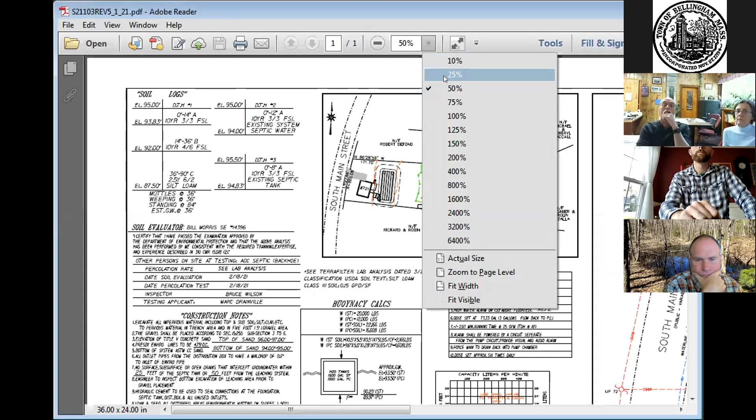Okay, this is a proposed septic repair for an existing 4-bedroom house. Now, apparently at the last hearing, we had missed a drainage pipe that goes right along the side of the property. You can see it right here in blue.

The earlier design, due to the slow perc rate, the system takes up the whole backyard. There's nothing I can do about that. I have to maintain a certain square footage. Actually, the square footage is about 1,700 square feet. That's how big this system has to be because I have a very slow perc rate.

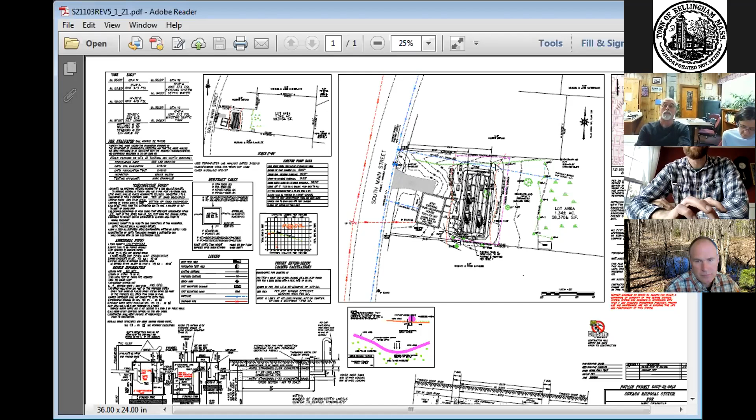But with that said, with this drainage pipe here, I was able to reconfigure this rectangle to accommodate the Title V requirements, still stay out of the 50-foot buffer zone of the wetland, and still be in compliance with Title V.

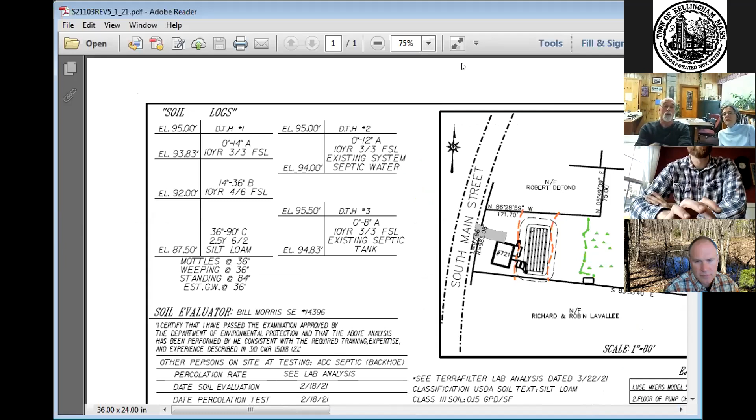I'm trying to zoom in, but for some reason when I do, it just kind of loses part of the system. I don't know what's happening there. That's okay. For some reason it lost the detail. I don't know why that's happening, but if I go back to 25% it shows it. Maybe it's a memory problem.

So basically, all this right here is the septic design. I was able to make it a little fatter and shift it this way, so I'm 10 feet away from that drainage easement, and I don't touch the 50-foot wetland line with my system. And these revisions have been approved by the Board of Health.

Good. You know, Margaret, Ann and I were out there inspecting this. We stood on the outfall for the drainage pipe. We saw the catch basin in the road, and we never put together that there was a pipe in the system.

Mike O'Haron, one of our members, picked that up at our last meeting, and I'm glad he did. Me too, I'd much rather find out now than during construction. It's the same here - I didn't give it a thought, and when we flagged that wetland, that pipe was half buried, so it wasn't evident and we missed it. I think my surveyor should have picked it up, but it fell through the crack, so I'm glad it got brought up at the last meeting.

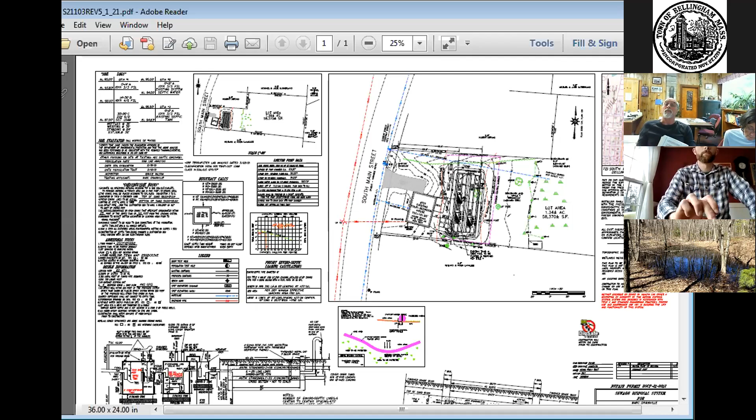Okay, so while we have people here, how does Saturday morning look for folks? I can do Saturday. Sure, that's fine with me. Okay, 9 o'clock. Sounds good. Noel? Yep, I may or may not be able to make it - I have a wedding that day, and I'm getting vaccinated.

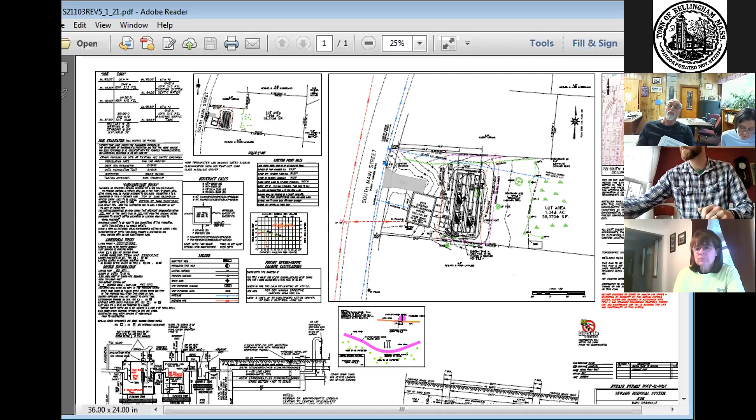It looks like Sean said yes. Mike, yep. Noel, Ariane, okay. I will sign it as well, so we'll have a majority. I can be there too. Brian can be there too. There he is, okay. Our die-hard Brian - I didn't know if we'd see you tonight, Brian. Perfect.

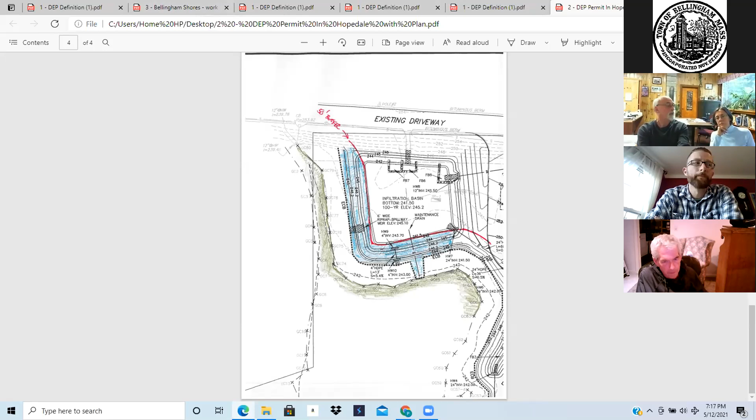And this area in red, again, the red area shows the 50 feet to the wetlands, and then the off-grading is between the wetland and the 50-foot buffer. They did keep the bottom of the basin, again, 50 feet from the wetlands where the infiltration does occur.

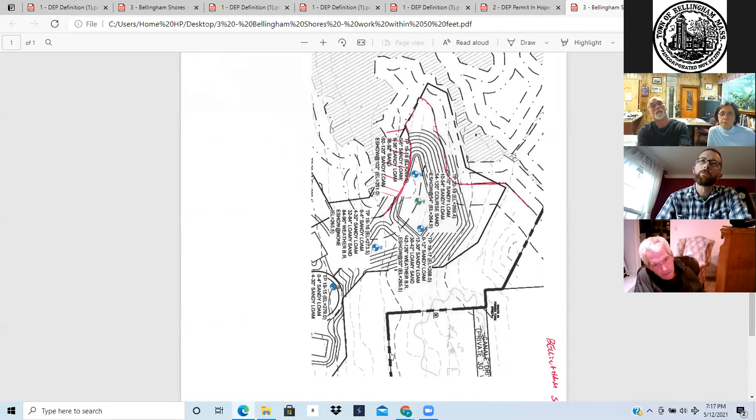Secondly, or thirdly, I'd like to show a project that Lincoln Properties did on the abutting piece, where they didn't hold 50 feet to the wetlands. This got approved at the state and local level where the infiltration basin actually sat on top of the wetland, so they had zero distance to buffer zones whatsoever. They actually filled in the wetland and then put their infiltration on top of it, which is in direct contrast to what Mass DEP says.

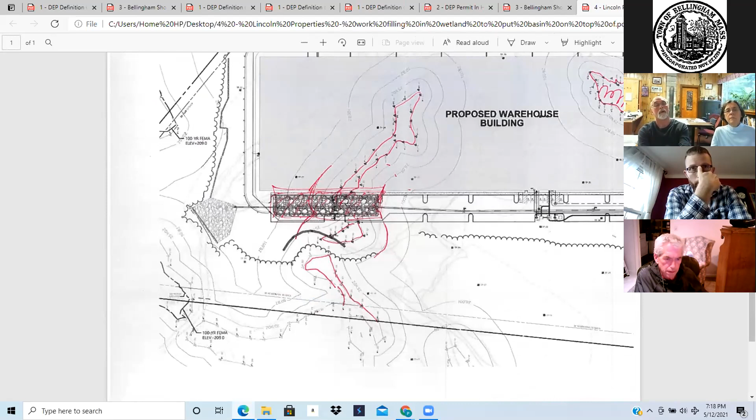And the last item is a previous project that we did — it's two more. Pine Hollow Estates was recently approved, and that work in similar fashion, the red being the 50-foot to wetlands, shows that the infiltration portion of the basin is greater than 50 feet, but the off-grading, the overflow spillway, and the outlet control structure are between the 50 and the wetlands.

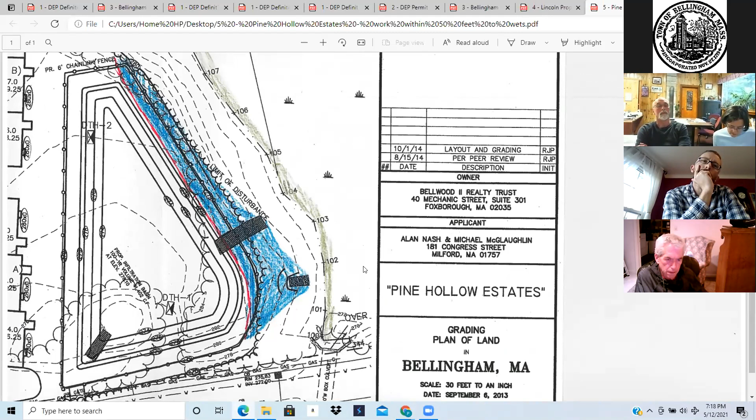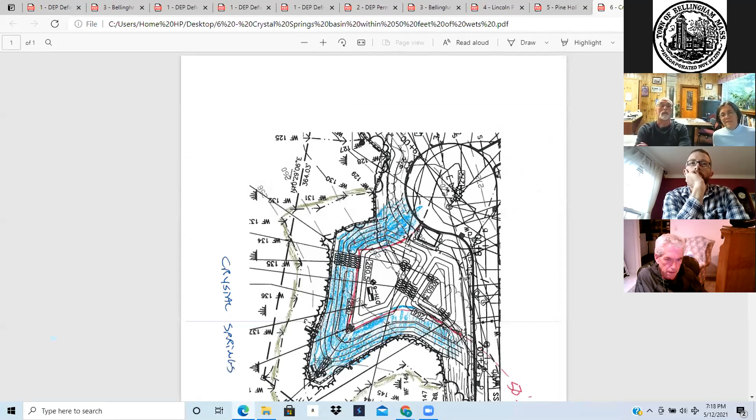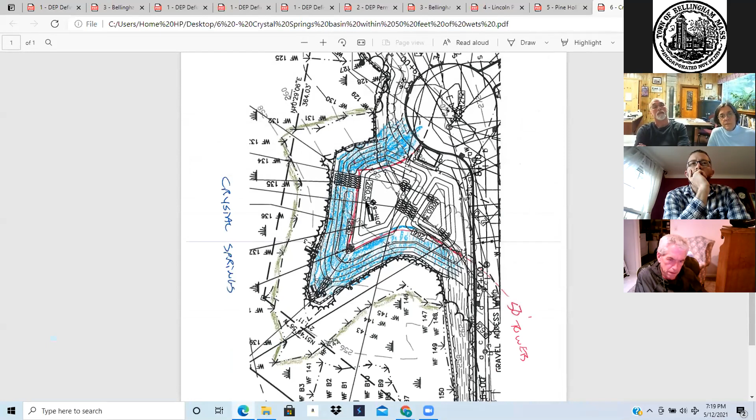And then, just because Kevin Lobiser is the applicant here, he was also the applicant on Crystal Springs, a condominium development off of Crystal Way. You may recall that this basin at the end of the cul-de-sac had its infiltration basin designed specifically so that the bottom of the infiltration basin was greater than 50 feet away from the wetlands, shown in red, but the berm, the outlet control structures, and the riprap spillways were all between the wetlands and the 50-foot zone. I think we have, and I can pull up hundreds if not thousands of other projects across the state exactly like this.

So I think we have a wealth of knowledge of how DEP acts as far as what that definition occurs. They were correct in their letter that said 2 of the 11 basins were within 50 feet, and we've made those changes. And that is exactly why I have reached out to DEP today, Mark, because if we're not getting the proper information from them in their comments, then how do they expect us to administer the Wetlands Protection Act?

Just the same way we just did the last 6 examples. We need to talk so that we can find out what is going on with these comments. That's all I'm saying to you. What we're saying is we're making our effort to try to work with you. And that's all I'm trying to say.

So what I'm saying is, in lieu of having a DEP response, we've just shown you 6 examples of how they've acted. And we can show you hundreds of examples. I didn't write the DEP comments. DEP wrote the comments, and they said 2 of the basins were within 50 feet of the wetlands, and we moved them out.

Never stops there. Excuse me, Mark. We are the local authority that administers the Wetlands Protection Act. Are you a commissioner, Ann? Excuse me? Are you a commissioner? I am the administrator. Okay, I just want to hear that, that's all.

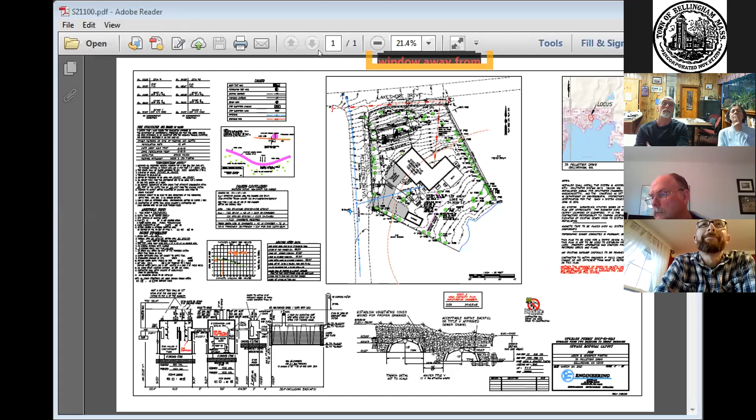Okay, I'm here representing my clients, Jason and Jennifer Fantini. As you said, they are upgrading an existing 2-bedroom house to a 3-bedroom. They're adding an addition, and because of that, they have to upgrade their septic system. So I'm going to zoom in a little here.

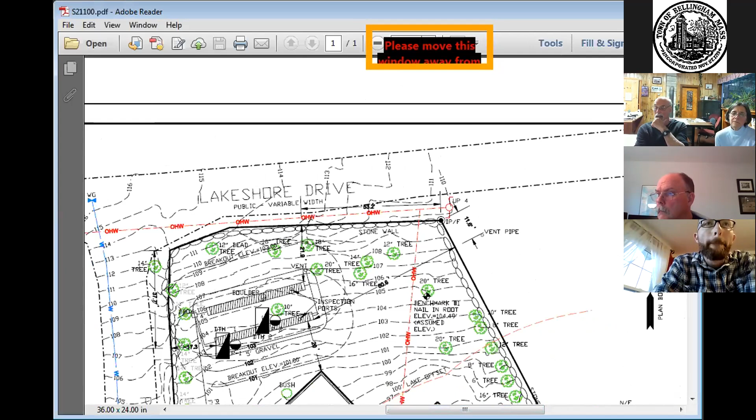Bear with me here. Okay.

So just to get your bearings, here's Pelletier Drive. They're right at the corner of Pelletier and Lakeshore Drive. Their existing system is in this general area right here.

So in order to upgrade from a 2-bedroom to a 3-bedroom house, waivers are not allowed, so you have to meet the full requirements of Title V. In order to do that, we had to move the system over here so I had enough room. Otherwise it'd be too close to the lake on this side, and it would have been a raised system over there due to groundwater.

So basically what we did, where the existing system is right here, we're replacing the existing tank. We're going to pump and remove, put in a new septic tank, a pump chamber, and then pump up to a 3-bedroom septic system, infiltrator system in the front yard on the hill. It is a step system, so it blends into the hillside much better.

As you can see, the septic system is outside the 100-foot buffer zone. There's the 100-foot buffer zone right there. So the only thing in the buffer zone really is the septic tank and pump chamber. So we're requesting a permit to do that activity, to upgrade.

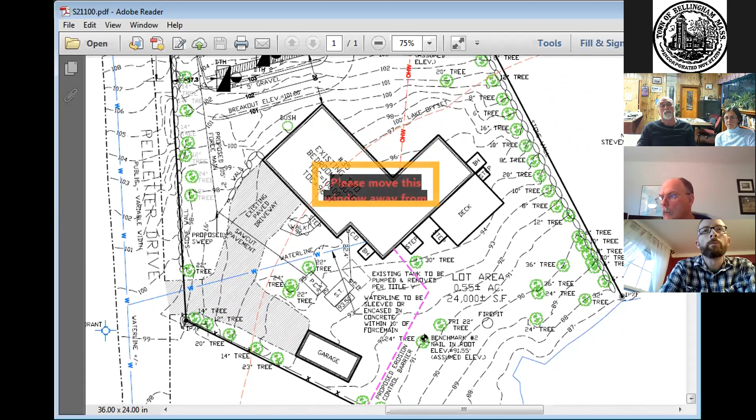Margaret, is the existing system failing? It looked like there was some breakout down there somewhere. I didn't notice it when we were out there surveying it, but I do know if they wanted to put in an addition, that system has to be upgraded to a 3-bedroom. And so that's what's actually triggering this. As far as I know, I think their system works, and I didn't notice breakout when I was there.

Do you happen to know how old the current system is? I'm willing to bet it's probably the same age as the house. That's my guess. Okay, thank you.

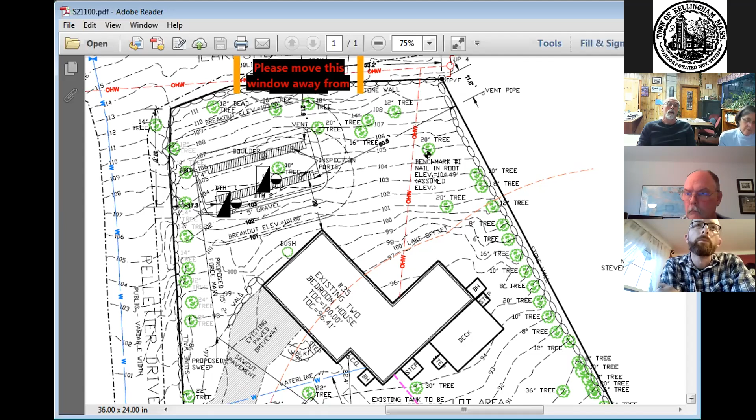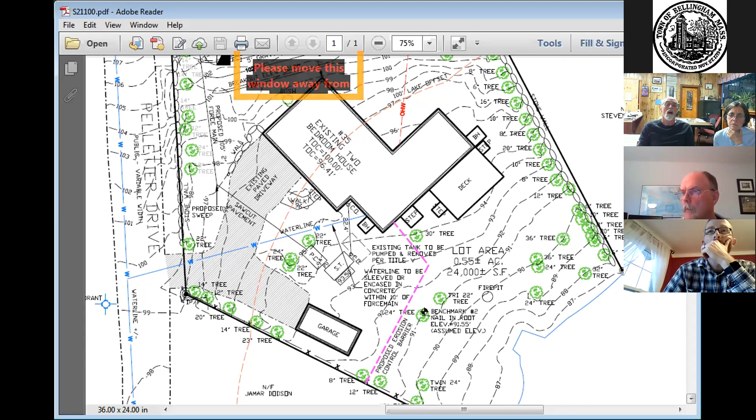Are you going to be removing the water line, or going under it? Chances are, it depends upon the depth of the water line. We won't know till we actually start digging, but anytime you cross over or go under a water line, you have to sleeve that water line, 10 feet on each side. So chances are we're probably going to go over it, but I really won't know for sure. It is a force main, 2-inch force main, which gives extra flexibility. That's correct.

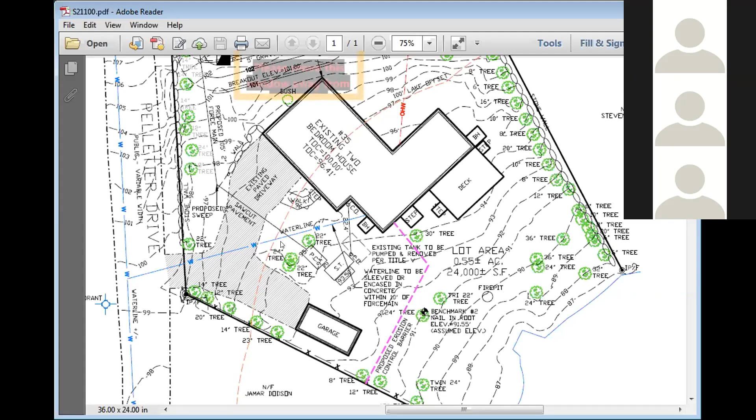Excuse me, Mr. Chairman, we have a question from somebody. Are they allowed to unmute? Can they put themselves on screen? Can they go on video? Yes, Jennifer, could you put yourself on? There we go. Thank you. Okay, hi, hello folks.

This is Jennifer Santini, the homeowner. In fact, our system is failing, that's why we're replacing it. It is the original system to the house. The house, I believe, was built in the early 50s. And so it's time for an upgrade.

Okay, so we'll need to make sure that that area is removed and clean material put in. Margaret, you're going to have to see that. We suspected that was the case, we didn't want to walk down into it. It's down near the water, probably just the other side of your sediment erosion control in that area. We can remove the contaminated material and loam and seed that.

Okay, so what we'll do is put that in the conditions. Jennifer, thank you. Did you have another question, your hand was still raised? No, I think that was from the previous raise, but thank you very much for all your help. Thanks, we appreciate it.

So yeah, we'll condition that: remove the material, put in clean fill, loam and seed. Other than that, it's a pretty straightforward project. It was an easy wetland delineation because it's the edge of the pond, the lake. Everything was as represented, and we saw the test pits, suitable material.

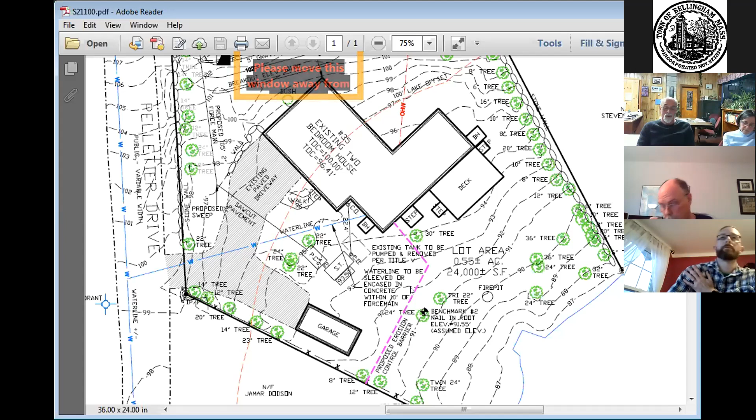So moved. Second, third, fourth. Discussion? All in favor? Aye. Okay, by unanimous vote, this is another one we'll put on for signature on Monday.

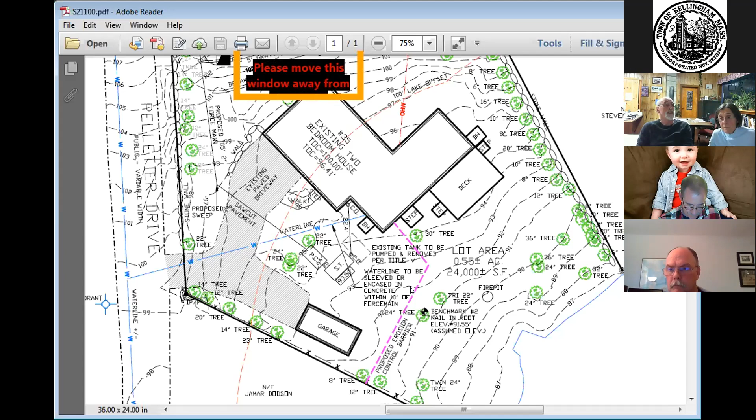Good night. Margaret, shall I send that to you, or do you want to pick it up on Monday too? I'll pick it up at the same time as the other, but could you put that on single-sided also? Of course, of course. Oh, she wants everything, yeah.

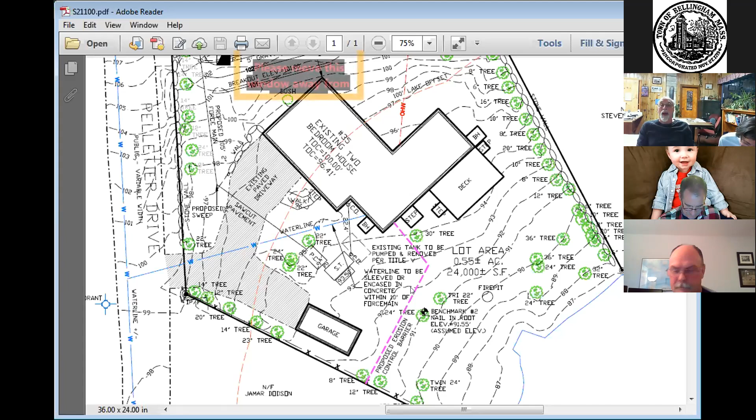Really, you want that gift wrapped, Margaret? Trust me, it's for recording purposes. It makes it a lot easier. Oh, yeah. Okay. All right, okay, thank you. No problem, no problem.

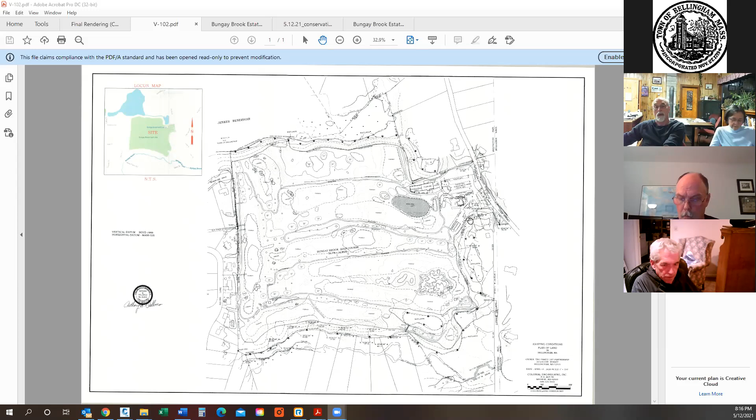Currently, the site is a 57-acre property, which is currently operational as a 9-hole golf course known as Bungay Brook Golf Club. There is a clubhouse located on the northern portion of the property with parking spaces for about 130 vehicles or so. There is a single family residential home, let's see if I can zoom in here, shown here, and a maintenance facility that services the property. There is a lined pond that provides irrigation to the property. And then off to the north, there's basically a driving range, and like I said, it consists of a 9-hole golf course.

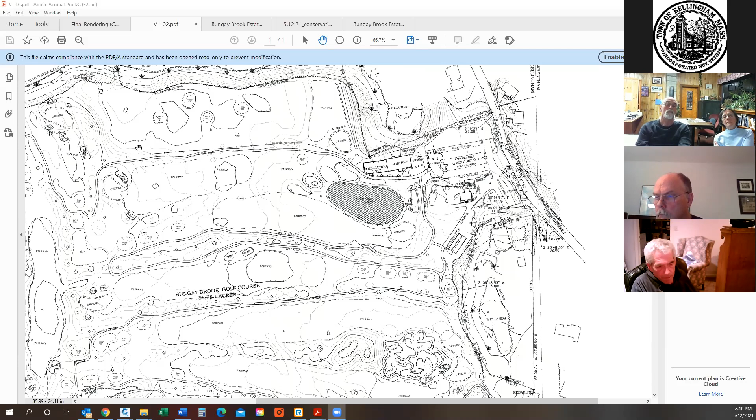So the property is accessed from its frontage on Locust Street. It's located on the west side of Locust Street. It's located in the suburban zoning district, as well as a small portion is located in the agricultural district in the northwest corner of the property. It's also located in the water resource overlay district.

So there are bordering vegetated wetlands located to the north of the property. Again, the Jenks Reservoir is located there as well. To the south, again, we have bordering vegetated wetlands and a perennial stream by the name of Bungay Brook. The Bungay Brook is actually located off the property, but it does project riverfront area onto the property.

To the north and south, we also have floodplain, Zone A and Zone AE. To the south, the floodplain is mapped at elevation 203. There is no elevation associated with the 100-year floodplain located on the northern portion of the property.

We have no natural heritage jurisdiction for the property, and the soils are basically sand. We did some recent soil borings out there about a month or so ago that showed sand to a depth of about 25 feet.

There are also a couple of monitoring wells located along the western property line. Current readings showed groundwater was at a depth of about 26 feet on one, and I think 28.5 feet on the other. So that's down at about elevation 197 and 190.

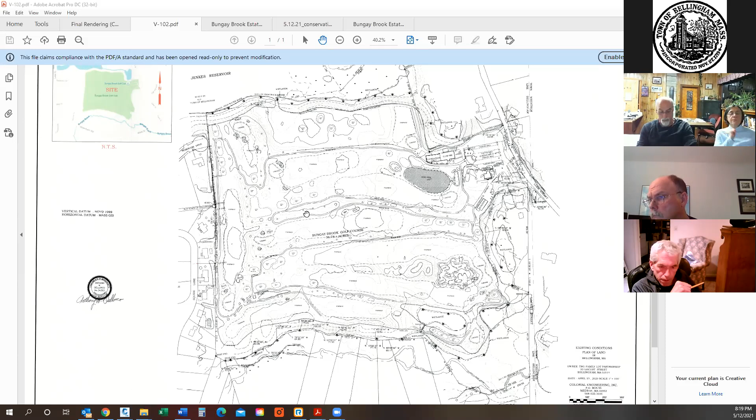Wastewater for the clubhouse, the maintenance facility, and the single family home are all on individual wastewater disposal systems, and potable water is provided by municipal water located off of Locust Street. So that's basically existing conditions to orient everybody.

Access is in the same location off of Locust Street as it is today. But it's going to be basically a boulevard entrance with 2 18-foot travel lanes separated by a 10-foot wide landscape median, which will provide a nice approach to the site.

The existing pond, we're retaining the existing pond as well. So as you drive into the site, it'll give you a nice welcoming feeling as you approach the development.

21 spaces in the existing parking lot will be reconfigured and retained, but pulled significantly off of Locust Street. So we have about a 70-foot buffer from the parking lot. I think there's maybe like 20 or 30 feet there now. So we're pulling that back and landscaping that area, decreasing a significant amount of impervious surface in that area.

So again, we have an access drive, which will consist of 2 11-foot wide travel lanes once you get beyond the median. We're also proposing a 5-foot wide bicycle walking lane off one side of the access drive.

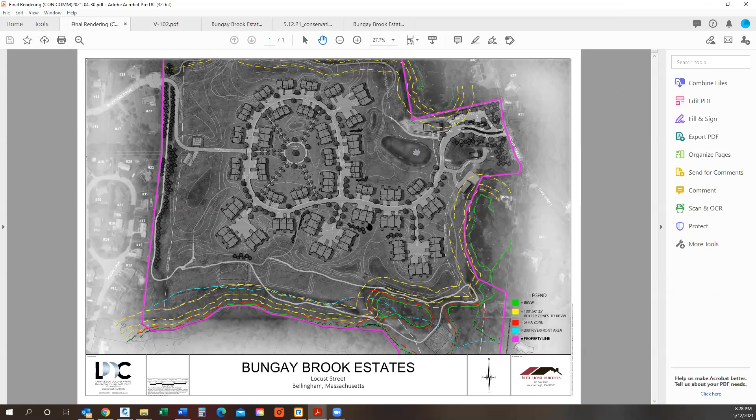So in conclusion, I know nobody likes to lose a golf course, but we feel that the site was designed in accordance with the local and state regulations, and we feel that this development is an appropriate use of the property, and again minimizes the impacts to the site as well as to the surrounding areas. So with that, that concludes the presentation. I know this was basically just a brief overview and introduction of the project, and there will be peer review and comments received, and we'll look to address those as we receive them.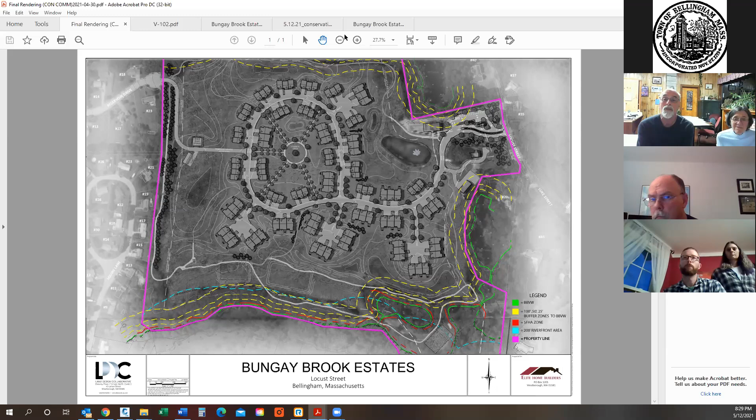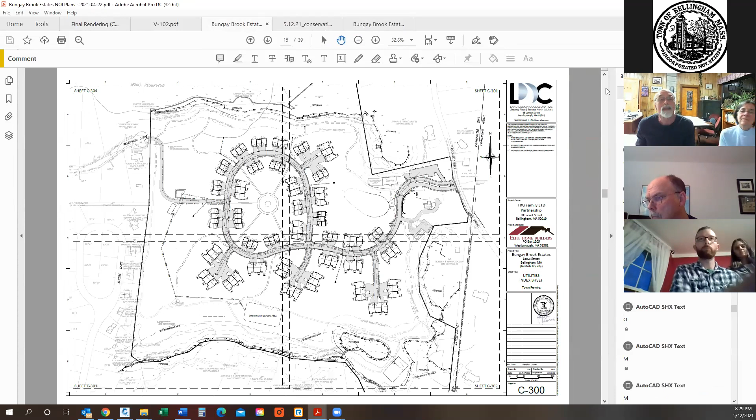Do you have the ability to call up some of the individual plan sheets by any chance? Sure, yes, I believe so. I'd like to take a look at the stormwater management systems. It's the 200 series. Can you get to that? Is there any sheet in particular you want to go to? We did take a look at this, and if you start at like even 201, some of the grading. I mean, it shows grading for the basins, but we don't see a lot of detail associated with that.

Maybe I'm missing something here. Yeah, no, I see it. I see an inlet structure there. I didn't see the details either, Cliff.

Normally we get grading plans, and obviously you're going to provide plans at a 40 scale. Yes, these are 40 scale plans. So we have 80 scale index sheets that show the 11 by 17s. Yeah, okay, you're reviewing 11. So the 11 by 17s may be difficult to read.

I have Mike Scott on the call as well, so if there are specific questions on stormwater, you'd probably be the better person to address those. Well, with depth of groundwater in your test wells and deep hole tests, it would appear that you're going to meet the criteria for the water resource district, which is 4 feet of separation of groundwater. Right.

These are very wide, how can I describe it, minimal grading. Right, yeah, they were designed to basically not look like they're there and make it look natural, very shallow. Maybe that's why I had a hard time spotting them. Yeah, they're very shallow depressions. They're not your typical looking detention basins, like holes in the ground. They're basically just what I described, very shallow, natural looking basins.

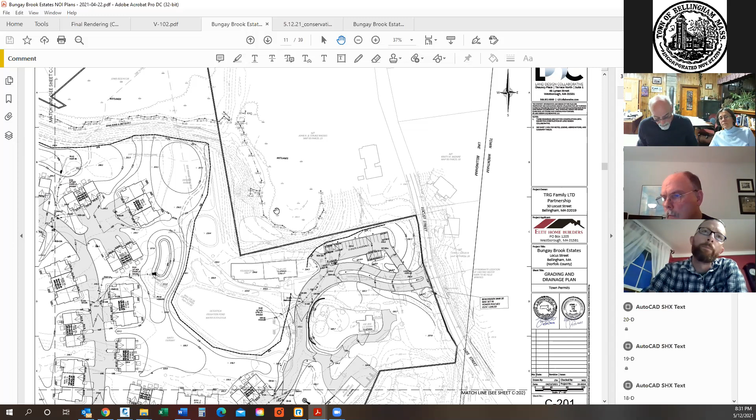How full are they projected to be? What's the maximum depth of water when they're full, at maximum minimal drainage, frozen ground conditions?

Let's see if I can - let's see if I got Mike Scott. Is Mike Scott still on the call here? Yeah, this is Mike, there you go. Thanks, Scott.

To answer the question, generally speaking, what we tried to do is perpetuate what's out there today, which is, if you've walked the course and are familiar with it, essentially everything drains internally. There are some drains on the site, probably some leaching catch basins and whatnot, but more or less everything runs to a fairway, somewhere in a fairway or one of the sand traps, and the water just infiltrates within the course itself rather than being piped off to the sides.

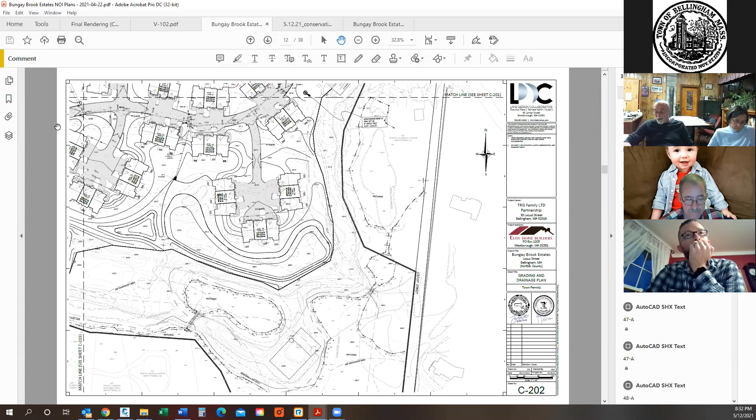Even the parking lot is drained into an infiltration basin. If you're familiar with the course, that's located directly in front of the irrigation pond. In the event that were to fill up, it would overflow into the irrigation pond and would subsequently discharge into a small depression just to the west of the irrigation pond. So we're essentially trying to perpetuate that condition, where there's a piped catch basin and manhole system for the majority of the driveways and roadways. The rest of the site, the walkways around the buildings and so on, would just drain off to the low areas, as you would experience today were you to walk the course.

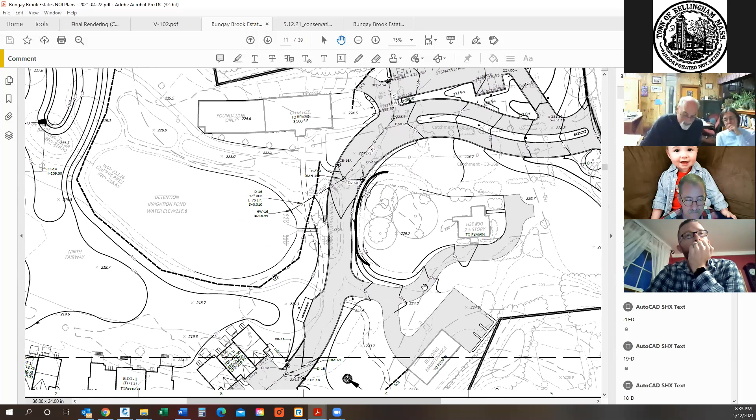When we did the soil testing out there, we did 5 borings so as not to destroy the golf course while it's still in use. Each of those borings returned essentially, in simplistic terms, beach sand. Water depths were deep, the estimated seasonal high was deep. We've tried to maintain them - we have maintained the minimum 4 feet. We tried to maintain at least 10 feet, and certainly have done so in most of the site.

So the idea is that what we're really looking at here is some large, shallow depressions where stormwater will collect as it does today and just infiltrate into the ground surface. In all cases, there is an overflow through - I won't call it a swale, but a saddle, if you will - a way for water that's ponded to make its way out from the site, should there be a condition where the ground is frozen or there's just an overwhelming storm. In no case would it flood one of the proposed homes.

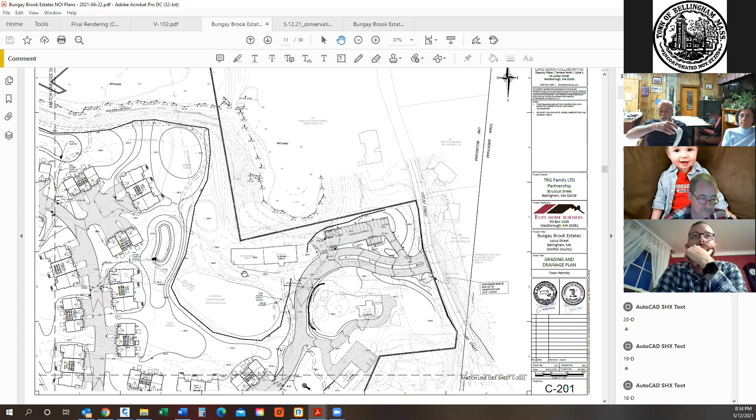But the idea was to keep the stormwater out onto the ground surface. Again, there's 25 feet of sand out here, and rather than install unsightly or conventional looking stormwater basins that maybe are smaller, tidier and tucked away, the concept was to leave it open, because if you've played the course, it rains, it dries out, and you're back on it within hours. There's no reason to think that's going to substantially change post-construction.

Actually, I'm not that familiar with the course. We wrote the permit for it about 25 years ago, but that's the last time I was out there on the course. So what we'll need to do is verify the wetland delineation.

This is something we always do. It looks pretty much like it's toe of slope all the way around. At least my recollection is, for the most part, that's what it was when the golf course was originally permitted.

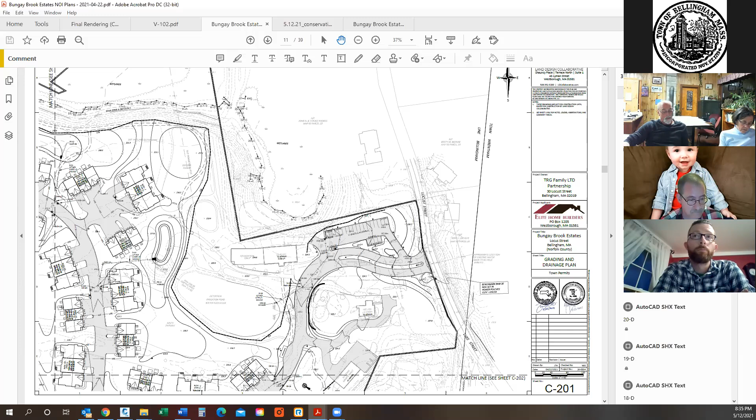So we'll need to set up a site inspection with your PWS, and we don't anticipate that that would be problematic.

I guess one of the things, this is like large, low impact development. So I guess what we're gonna do is request that you make sure that the low areas are sufficient to handle the 25-year storm in its entirety, anticipating frozen ground conditions, and all the freeboards, all the standard in our stormwater regs.

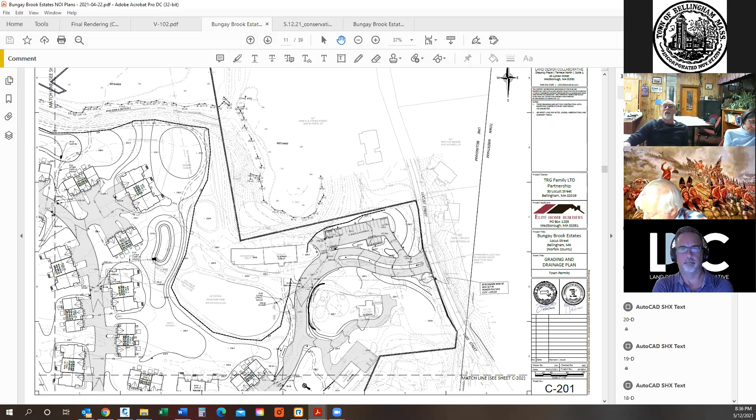Mike, did you account for those? I'm still kind of waiting for a little more definitive answer. I understand they're very shallow depressions. We want to keep things natural. My question is sort of two-pronged.

One is, if you know a depth that they should max out at of water, given that this is not a golf course anymore, and both the usage and the amount of impervious materials, even though you're trying to decrease it wherever possible, is going to substantially increase. It's a residential area now, or it's going to become one, and usually around detention basins, if there's enough depth, we require fence for safety, and given all these residences, you would probably want to have that.

It's a planning board thing, probably more than Concom, but I still didn't hear, I understand drains well, but do you not have calculations for frozen groundwater in these very shallow basins? Is it going to be a foot deep at the max, or is it going to be 3 feet?

Well, the stormwater report, there was a full stormwater report with depth in each basin, we did not add that to the plan. It can certainly be added, and we can delineate on the plan where those ponding depths are. It will be obvious by reviewing the stormwater report. But again, we didn't call that out on each plan. We can certainly add that.

And we did not add wicks or any sort of device to introduce or puncture frozen ground per se. We could certainly look at doing something like that, but we did not include that at this time.

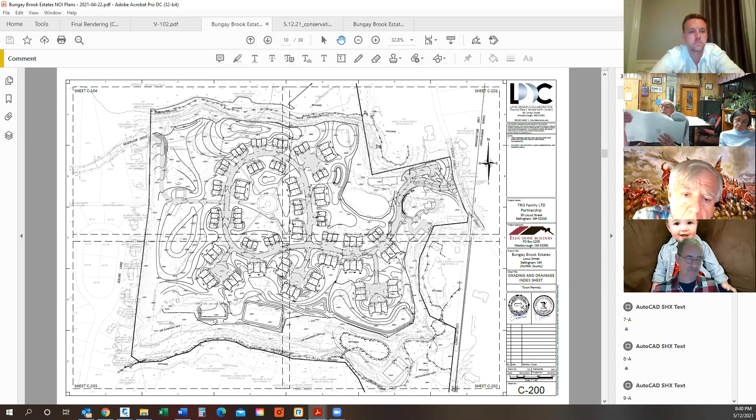Mr. Chair, yes, I'm one of the abutters. I had a question. We encourage discussion. In the northeast corner, for the screen share—Mr. Almonte, are you still sharing?

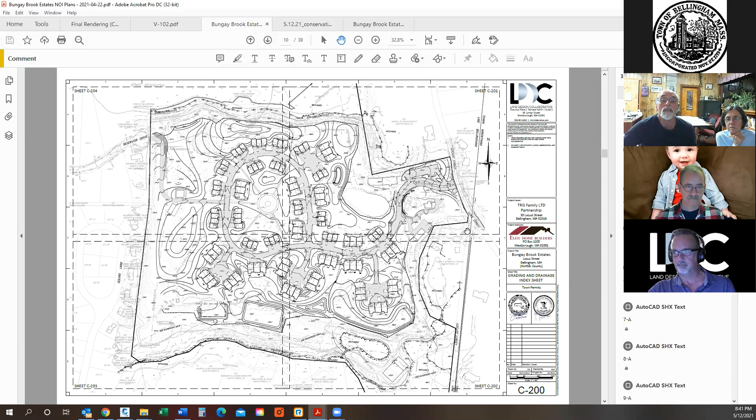Yes. So where the parking lot's being added behind the current clubhouse, near that wetlands, at about the 200-foot elevation—with the parking lot being added there, what would be the water runoff plan for the storm runoff? Would it head right toward that wetlands or to a different basin?

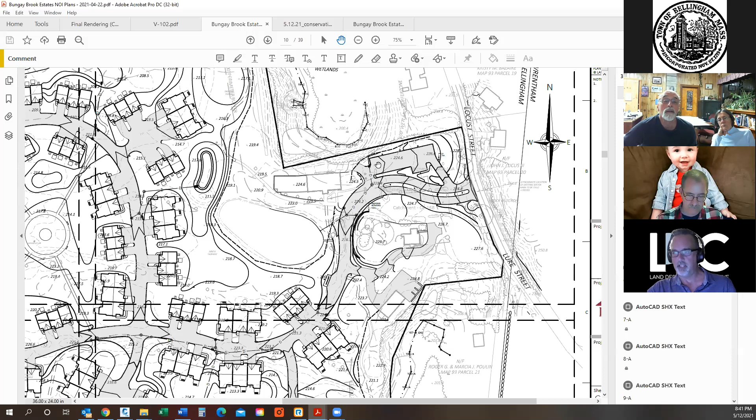No, it's picked up in a catch basin located here. You're going to zoom up—there's a structure here. So these are the contour lines, and it's actually grading away from this edge, flowing down a gutter line here into a catch basin, then into a drain manhole that flows eventually into the existing pond.

Because my concern right now, like you mentioned, Locust Street is considerably higher elevation than the new parking lot—224.6 right in the center of the parking lot. My fear is that a lot of the water runoff in a larger storm would go right down that embankment, causing serious erosion into the wetlands.

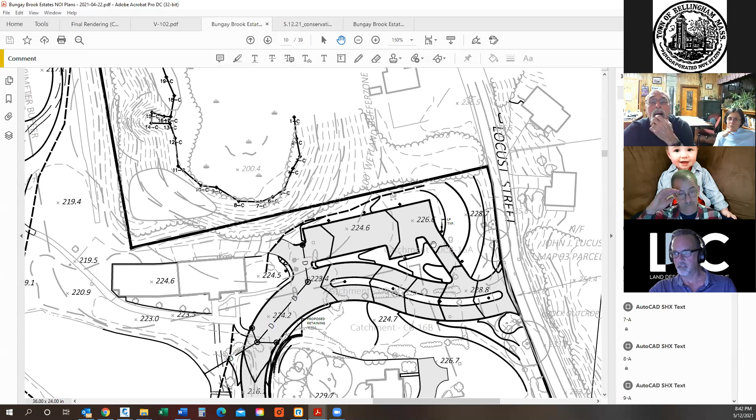Well, look at Brian's comment here. I don't see an elevation on Locust Street—I see a spot elevation by Brian Rhodes' house at 236. I believe there's a spot, a 234.6 right there. Okay, yeah, 234.6. So I understand what he's saying.

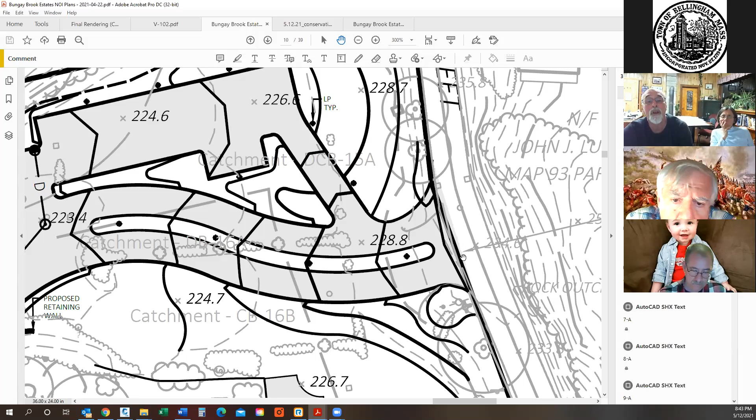It looks like that could be a low point in the road, so you could be getting a run down Locust Street. There's not a whole lot of drainage on that, if I recall. I see a couple of catch basins—yeah, there's a couple catch basins right there.

Do we know where they go, and if they'll be sufficient to intercept some of that water, because you're going to be widening that access road, correct? Slightly—it's pretty much utilizing the same opening that's there today.

Well, I think that's something we're going to want our peer reviewer to look at, and it's something you might want to think about. I don't know where those catch basins daylight—God, I hope it's not down in the wetland. But back in the day, that's the way they used to do things, probably, right?

So yeah, I mean, I can see his point. I don't know if you allowed for that contributory factor when you did your calculations, or was it all strictly on site?

Mike, do you want to address that, if you're still on? If you are, we can't hear you. He got tired, I don't blame him. Sorry, no, I'm sorry—I had minimized and I had trouble finding the unmute button.

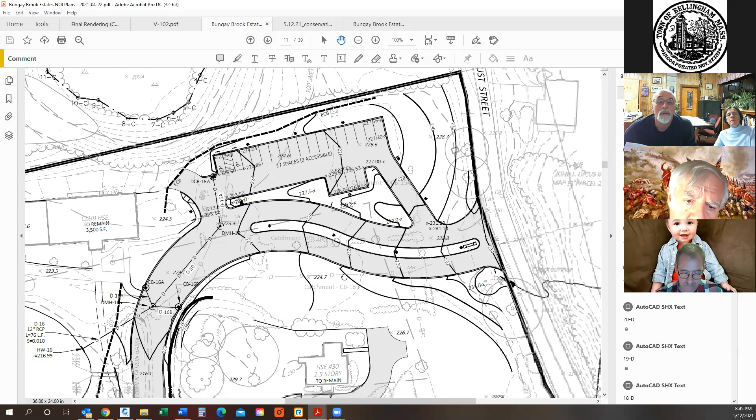It slopes up and then back down at the property line next to Mr. Rhodes' home. Then the driveway continues down gradient behind the existing clubhouse, so that portion of the parking area below the catch basin would run down to a low spot and then run over the lot line northerly into that wetland area behind Mr. Rhodes' home. That's the current condition—there's no change proposed to that, other than to reduce the size of the parking lot and replumb it, putting in modern, up-to-current-standard deep sump catch basins, delivering it to a stormwater treatment facility before discharging into the presently used irrigation basin, or pond rather.

So there is a chance that some water will run into the site. We did not assess that, as I say, but we're not looking to change any conditions at the road. No, but what we always look for is an opportunity to improve conditions, so if that's a possibility, we'd like to investigate that.

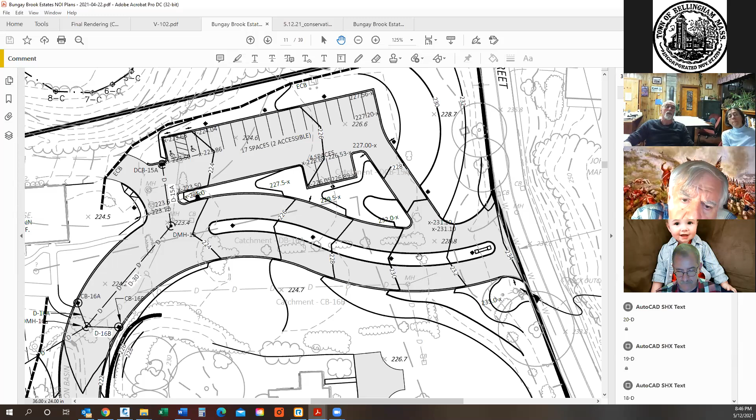I'm going to ask Mr. Rhodes—to your knowledge, have you ever seen water from the existing parking area overtop and go down the bank? At this time, it's not paved. The proposal is to pave it and bring it closer to that embankment. Right now it's just gravel, so it's not as much of an impervious surface, and the water does get absorbed.

We do see a lot of erosion down the bank. We have a lot of people who will come out of curiosity and cut over to the wetlands. However, you're dealing with all adult professionals, and golfers are pretty courteous for the most part. My fear is when we have a clubhouse here and visitors to the community, you're going to have kids say, 'Ooh, there's a pond with ducks, turtles, we have foxes that are really close there.'

We're just concerned about it being a very steep embankment all the way around that pond. It's a very sharp slope on the back, northwest side, or more of the west side of what you're showing right now is pretty steep, but also going from that parking lot it's a decent slope. If you were looking at the clubhouse and looking out, you would not want to walk there because you could easily fall in and keep on going basically till you get to the pond.

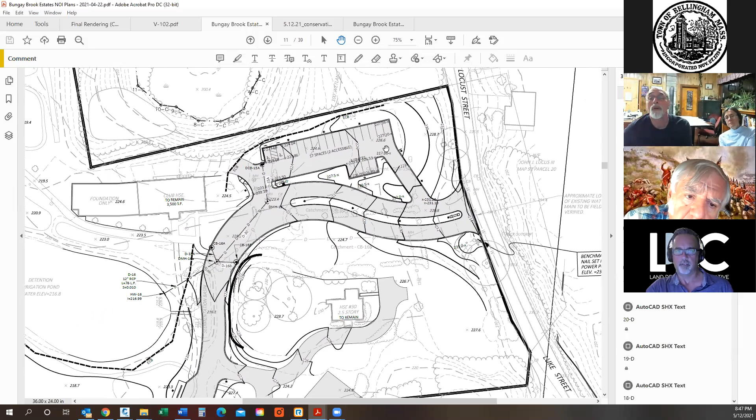I suppose... We're actually pulling this further away from where it is today. I think this is a transformer here, which is right on the edge of the parking lot now. We're pulling it further away, and it's going to be curbed as well. And as I mentioned, the gutter line, it's pitching away to the back edge of these parking spaces. So the gutter line is here, and it flows to that catch basin.

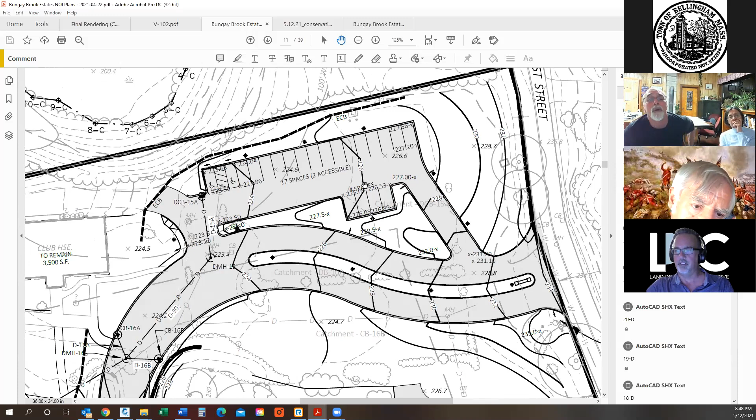I'm seeing spot grades of 226.6 in the middle of your parking lot. Those are existing grades, Cliff. Yeah, those are existing. The italicized ones are existing. The standard text is proposed.

So James, the way I understood it, the unpaved parking lot—yes, you're backing the paved parking lot back, but the pavement is being added. But I'm not positive. I'm looking at... yeah, it transitions. There are some areas that are paved that will continue to be paved. There are some areas that are gravel that will become paved. Yeah, and that's where I was concerned. New pavement was going to be within the 50-foot buffer zone versus possibly relocating it outside the 50-foot buffer zone.

I know it's hard to see on this plan, but that's the 50 foot right here. This is the 100. That's the 50, so we're just outside of the 50. 50 is the limited disturbance zone. I think I understand, and looking at that slope, it looks like maybe it's a 2.5 to 1 slope.

We might be well served by having a densely planted row of trees along there to prevent people—arborvitaes or something that will grow tight and keep people from wandering back down in there. You hate to have fences. Possibly a split rail across the back of the parking lot, Mr. Chairman—something that would prohibit people but wouldn't look too bad and allow critters to come and go as they might. You might even need some guardrail right at that corner that's right at the steep slope. I think that's a smart call.

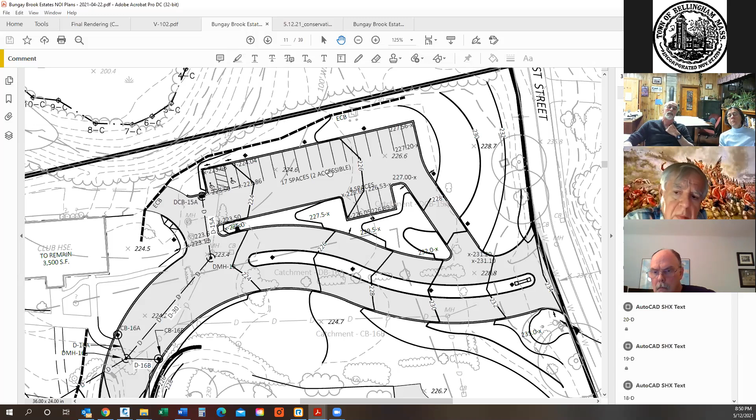We can come up with some kind of natural barrier to prevent people, and that would be a critical area for snow storage as well, to not have it in that particular area along that side. So James, that's something to keep in mind as well. The other thing, James, I would be open to the concept, because I noticed in all the lighting diagrams of the spaces, if it was a natural fence of arborvitae or something to prevent the erosion, it'd probably minimize any trash blowing into the wetlands, but it would also cause a buffer of all the light pollution from going from one property to the other. So that might be an amenable solution. It's a good suggestion.

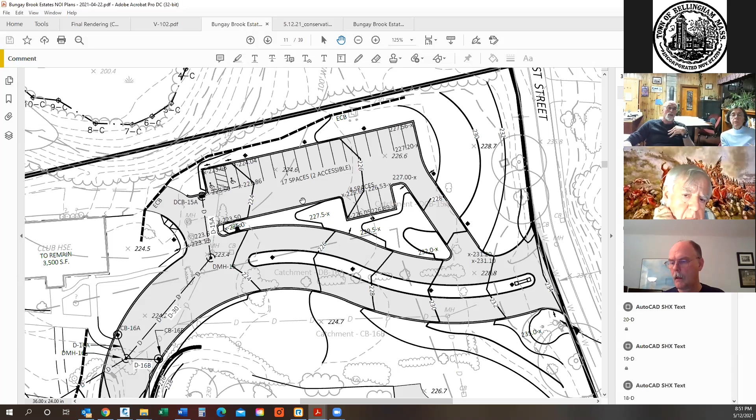Okay, so I have another question. It's relative to the sewer line. I know that you're working with the church trying to gain access for a cross-country stub for your sewer line. You understand, of course, that any work associated with the sewer line that's in the buffer zone, you'd have to file for that. Correct, yes, we're aware of that. Okay.

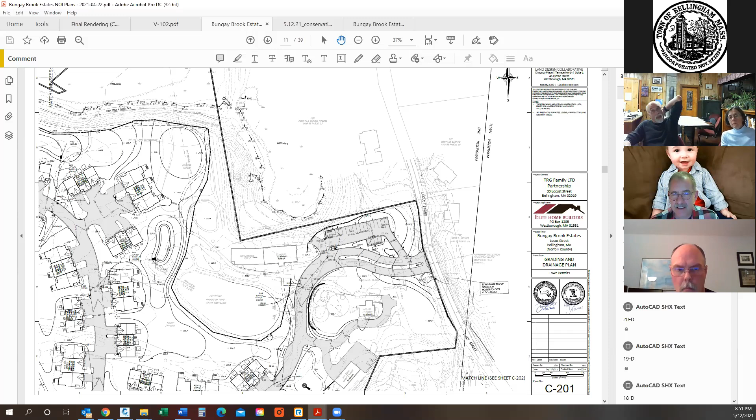Mr. Chair, one more question for Frank to keep in mind. The pond that is used currently for irrigation is a lined pond, I believe, and I thought I read it in some information. So it does not naturally, in any capacity, drain down or infiltrate, correct?

So Mike, what happened there is when the golf course was constructed, they needed a way to water. And because of the soil conditions, it couldn't keep water there. So that's going to stay that way, correct? Correct.

That's okay, so my question would be this. If you're now having, I don't know how much water flowed from what areas currently with the golf course into that pond, but if you're going to be adding to it, as I thought I was hearing certain descriptions as they went through the narrative, to the current input of water, and it's not going to be pumped out to irrigate golf courses, what's the plan going to be for when you get a lot of rain and these other areas that are draining into it now flow into an area that does not naturally allow it to seep into the ground? Where is that water going to go when it gets close towards the top? I don't know how much freeboard there is now and how much room there is to go for storms, but unlike other areas, it's not going to gradually flow back down into the ground and be absorbed.

Do you want me to answer that, Jim? Yeah, go ahead, Mike. So the existing parking area that was just being discussed on the northeast corner here, that's all piped into that area now. There is a small infiltration basin up gradient, or upstream of the pond, just to the right, sort of under the new driveway. That will go away.

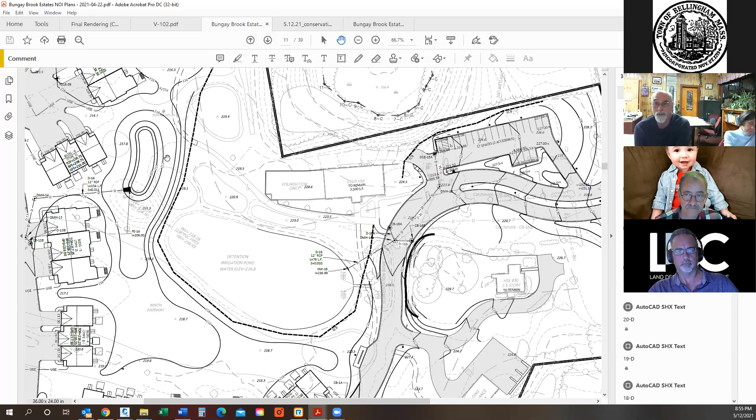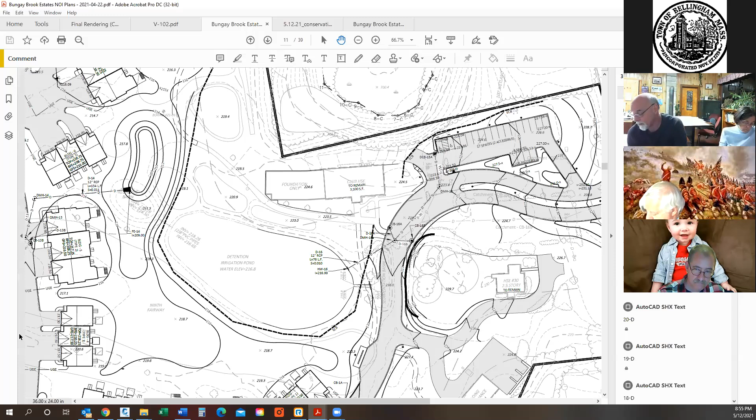Okay, we have another hearing, but really quickly, is there anyone watching who has a question relative to the stormwater management system or the wetland resource areas? A lot of my questions fall for planning board, Cliff. Yeah, I understand there are a lot of planning board questions, but all right.

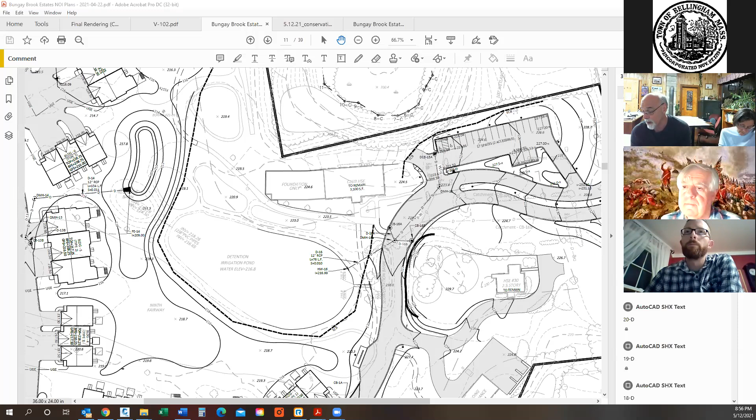So we don't have the scope yet. So my proposal here is, since we don't have a meeting on the 19th, and our June meeting on the 9th is already full, I'm thinking, Frank, if we get the scope, you'll at least have an opportunity, and we get the payment contract and everything in order. Do you think it's possible you'd have something on June 23rd? Yes. Okay, that's a month. It's a month and a week. All right.

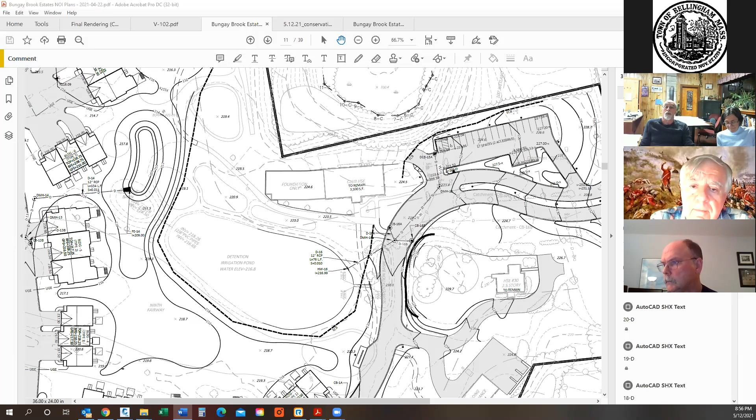Okay, well, we thank you. Thank you, gentlemen. Oh, okay. Have a good night. Good night.